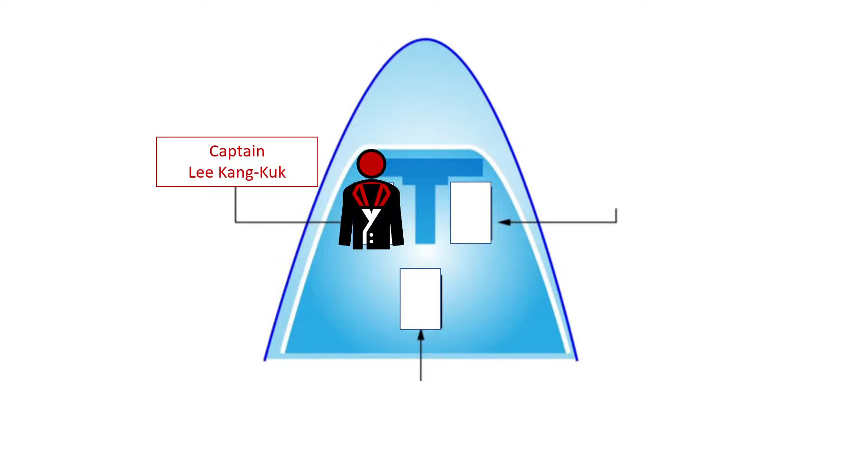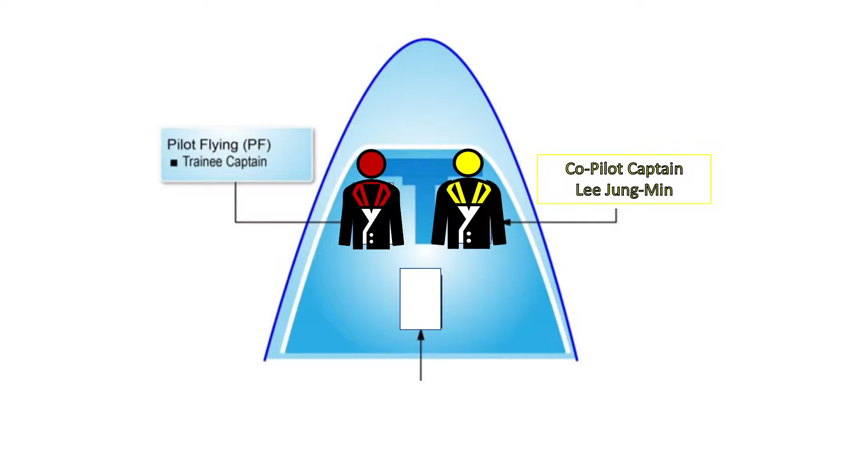Captain Lee Jung-Min, 41 years old, had 12,387 flight hours, including 3,220 on the Boeing 777. We will refer to him as the pilot monitoring, as he was responsible for monitoring the trainee captain.

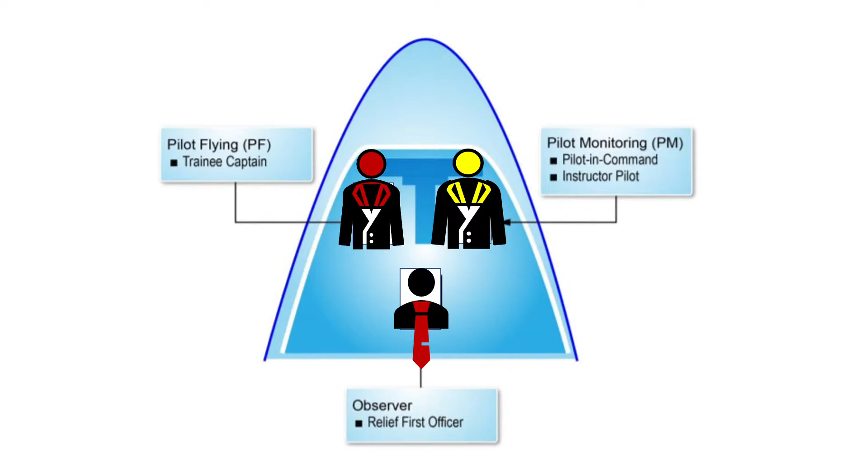Additionally, there was a relief first officer sitting in the cockpit jump seat. Sitting somewhere in business class, a relief captain was also on board to provide relief to the primary cockpit crew at some point en route of the 10.5-hour-long flight. The aircraft was staffed with 12 flight attendants. There was also a total of 291 passengers on board.

Because of the presence of visual meteorological conditions, San Francisco Approach Control was able to give Asiana 214 a clearance for a visual approach without a working instrument landing system. The pilot monitoring confirmed the clearance and the cockpit crew began their descent. The lack of an instrument landing system, or ILS approach clearance, is an important factor when we discuss accident findings.

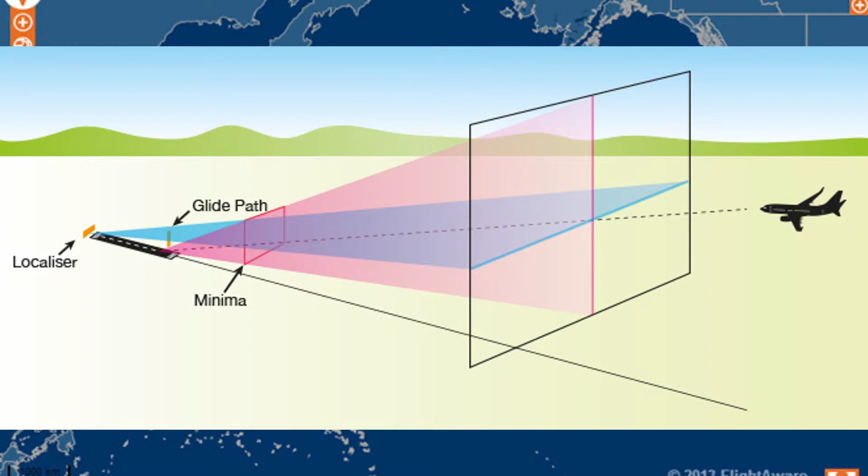The pilot monitoring recognized this and alerted the pilot flying. They were able to get the aircraft on the appropriate visual glide slope 30 seconds before the crash. However, it seems that the pilots overshot their rapid descent rate, as the PAPI lights indicated that the aircraft was very low 19 seconds before the crash.

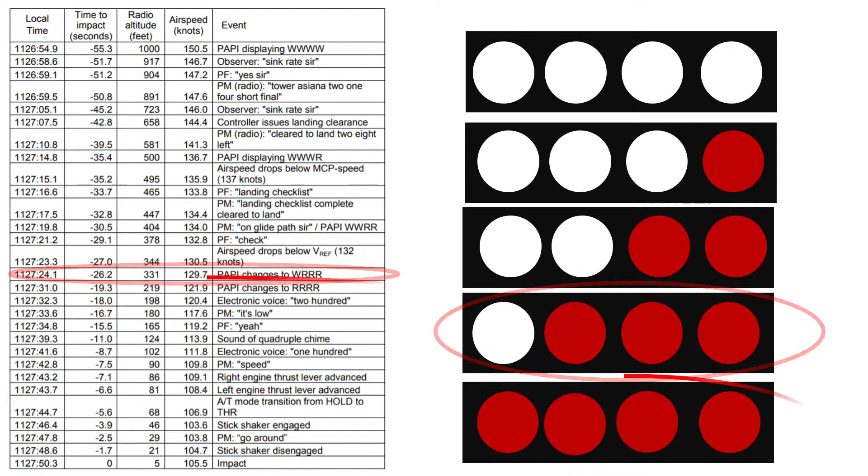We are now going to watch a short flight simulator clip. This ghost aircraft shows where the plane should have been, while the solid plane simulates where it actually was.

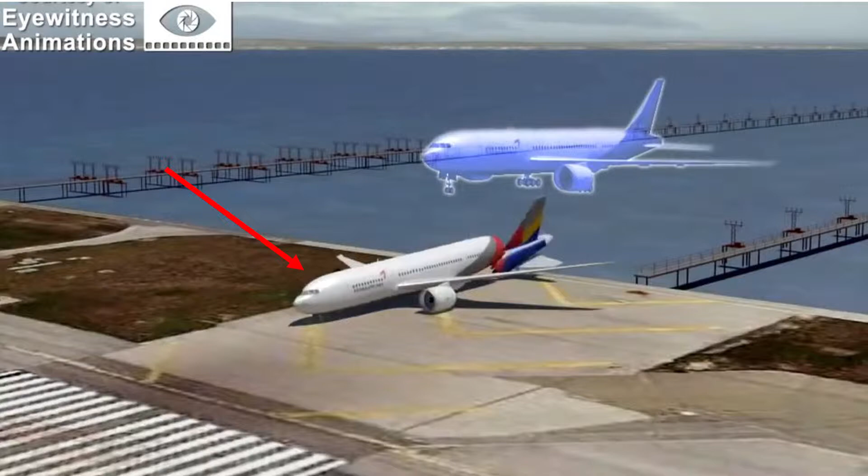Asiana 214, San Francisco, runway two eight left, cleared to land. Cleared to land two eight left, Asiana 214.

The NTSB identified the following as probable causes of the accident: the flight crew's mismanagement of the aircraft's descent during the visual approach, the pilot flying's unintended deactivation of automatic airspeed control, the flight crew's inadequate monitoring of airspeed, and the flight crew's delayed execution of a go-around after they became aware that the airplane was below acceptable glide path and airspeed tolerances.

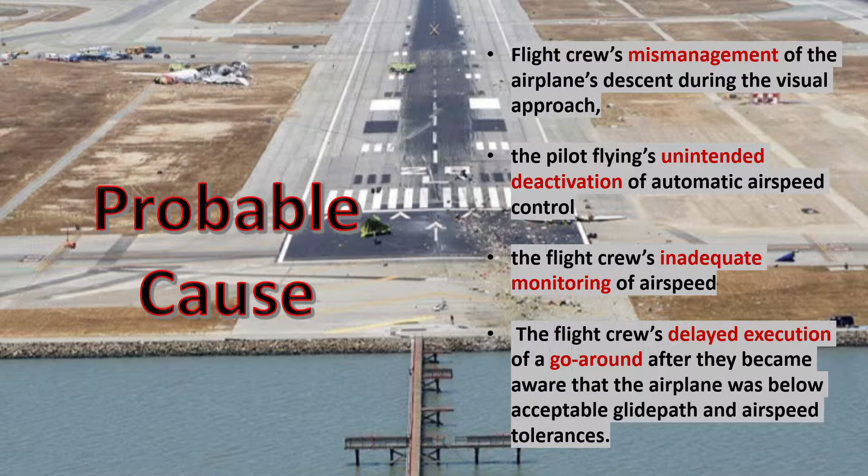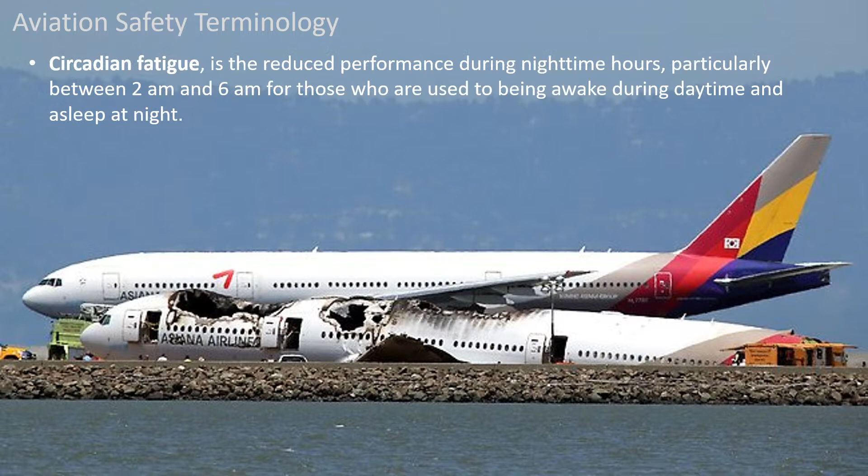We are now going to look at how automation error, mode confusion, automation surprise, circadian fatigue, and crew resource management played a role in this accident.

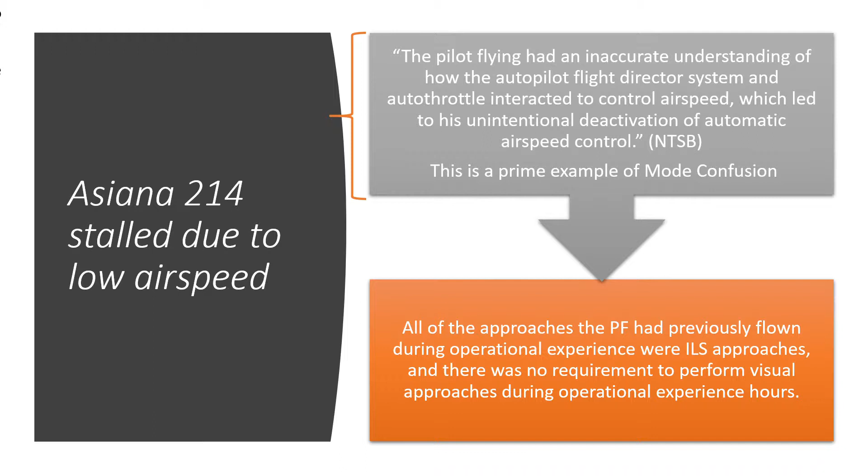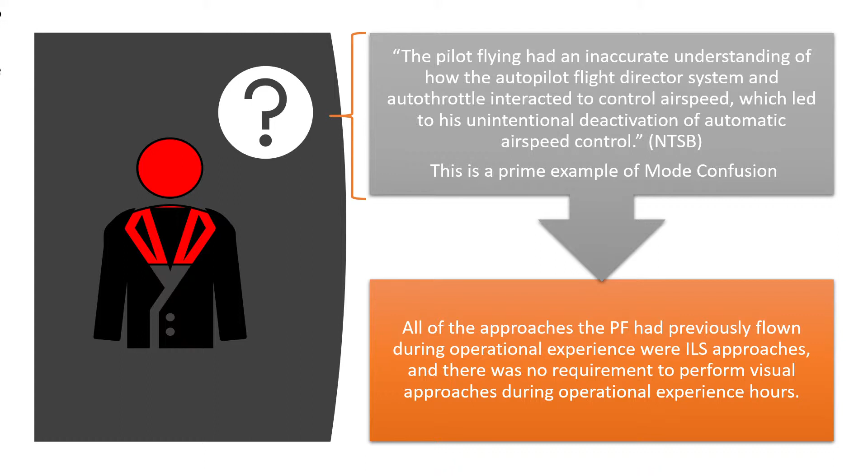The plane crashed due to a low airspeed stall. The NTSB identified that the pilot flying had an inaccurate understanding of how the autopilot flight director system and autothrottle interacted to control airspeed, which led to his unintentional deactivation of automatic airspeed control. This is a prime example of mode confusion.

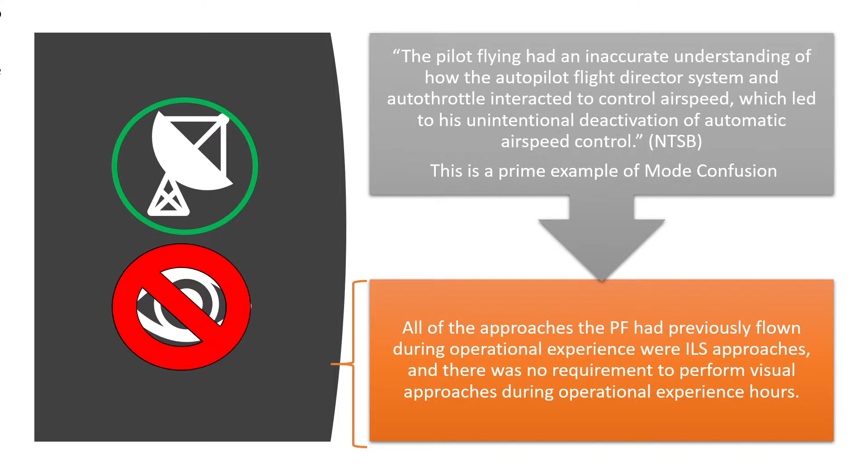Additionally, all of the approaches the pilot flying had previously flown during operational experience were ILS approaches, and there was no requirement to perform visual approaches during operational experience hours.

The NTSB found that in the 24 hours before the accident, the pilot flying, the pilot monitoring, and the observer obtained about 5.5 hours, 8 hours, and 10.5 hours of sleep, respectively, as compared to their self-reported sleep needs of about 7.5 hours, 7 hours, and 7.5 hours.

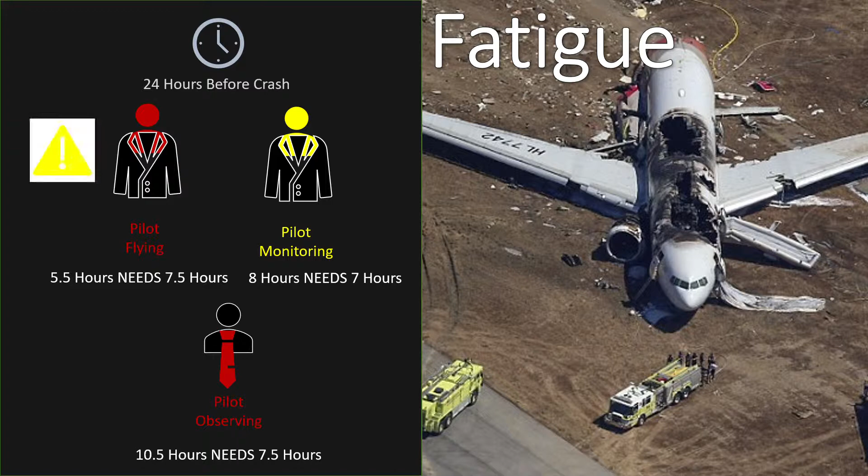Thus, the pilot flying received less sleep than normal in the 24 hours before the accident. Notably, the accident occurred during the pilot's circadian trough, a period about midway through the normal sleep period when a person's physiological state of arousal is normally at its lowest. The human body cannot adapt to transiting 8 time zones in the span of 10 hours. Therefore, all 3 pilots were likely fatigued as a result of circadian disruption.

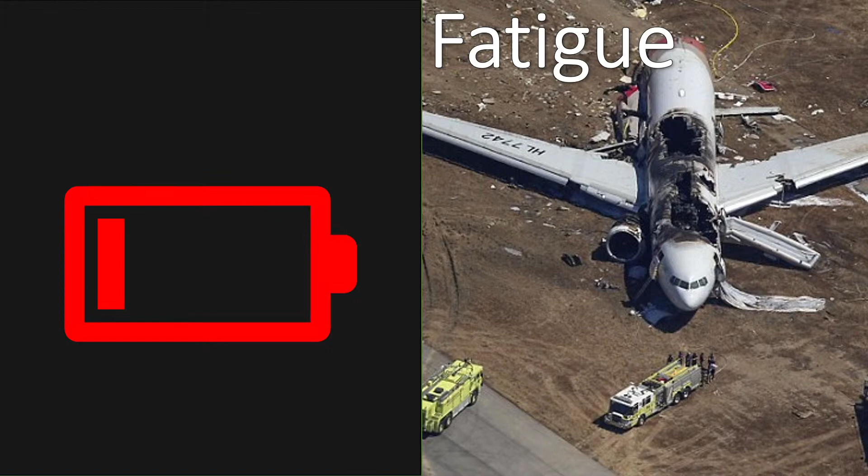Poor crew resource management was arguably the leading cause of the accident. As a reminder, the trainee captain was the pilot flying, the pilot in command was the pilot monitoring, there was a relief first officer in the jump seat, and there was a relief captain, but he was in the cabin business class at the time of the approach.

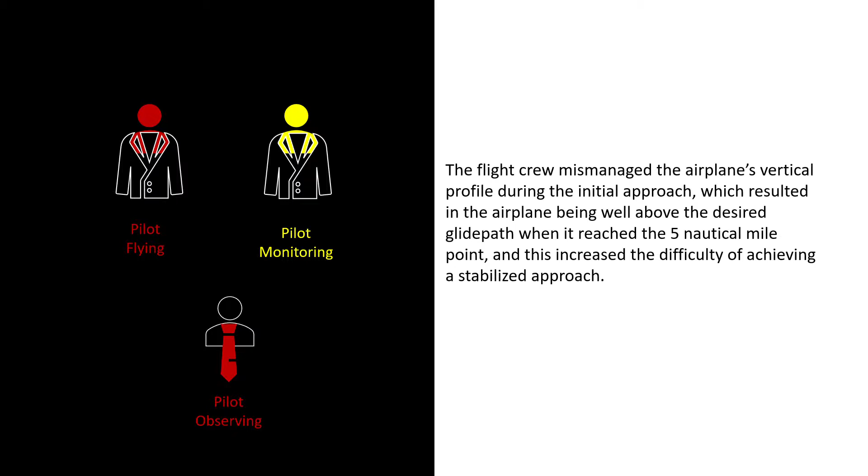Upon investigation, the NTSB stated the following findings. The flight crew mismanaged the airplane's vertical profile during the initial approach, which resulted in the airplane being well above the desired glide path when it reached the 5 nautical mile point, and this increased the difficulty of achieving a stabilized approach. The flight crew's mismanagement of the airplane's vertical profile during the initial approach led to a period of increased workload that reduced the pilot monitoring's awareness of the pilot flying's actions around the time of the unintended deactivation of automatic airspeed control.

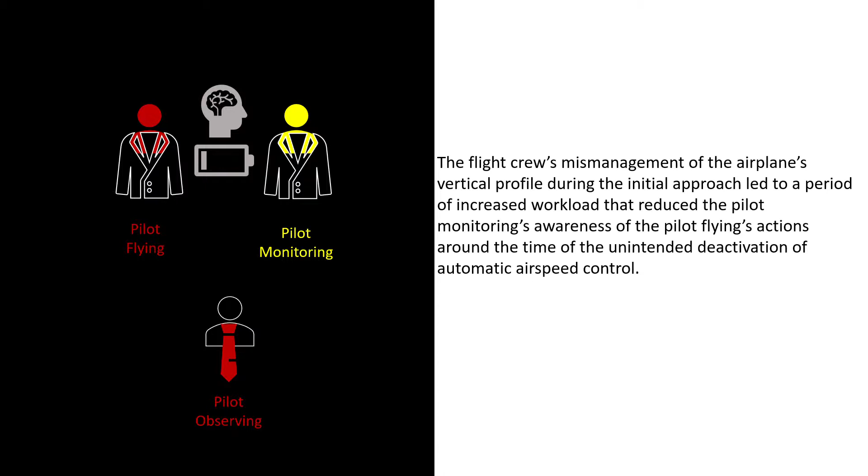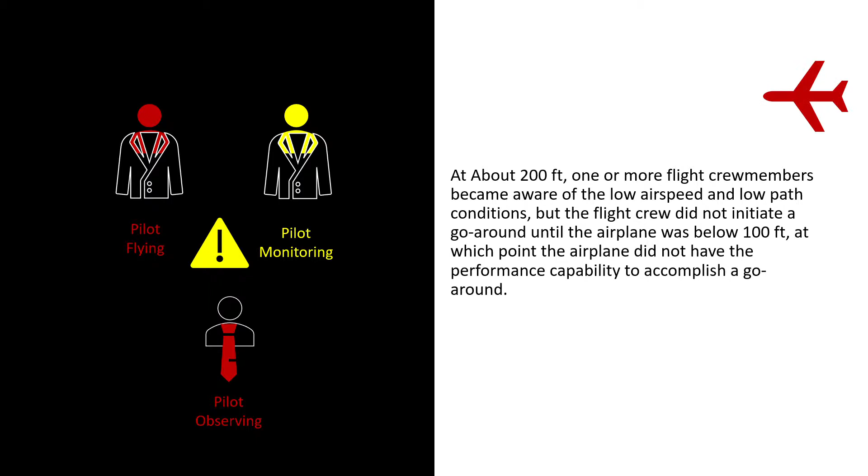At about 200 feet, one or more of the flight crew members became aware of the low airspeed and low path conditions, but the flight crew did not initiate a go-around until the plane was below 100 feet, at which point the airplane did not have the performance capability to accomplish a go-around.

The accident caused complete destruction to the aircraft by the impact and post-crash fire. There was also damage done to the PAPI lights and part of runway 28 left.

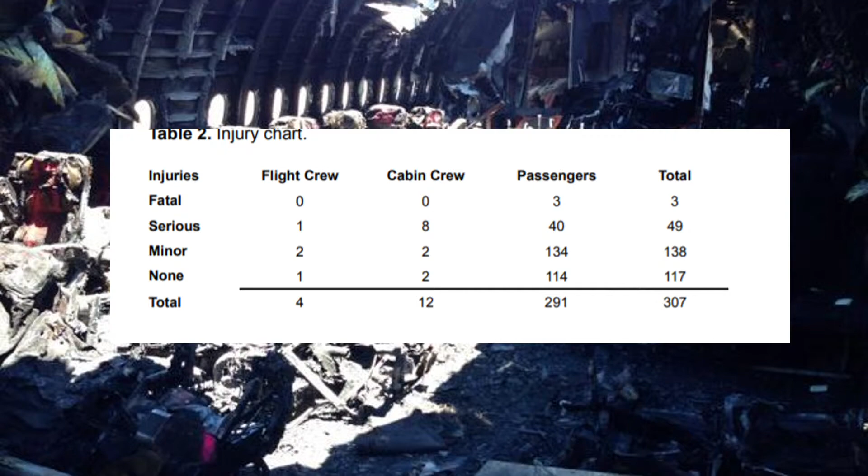I discussed this accident with commercial pilot student Carlos Berezueta de Felipe. He made the following recommendations to Asiana Airlines: Asiana and other airlines must learn from this accident that pilots should be trained in all types of approaches, not only in using ILS, so that when they encounter a visual approach, they know how to control the aircraft. Also, another important aspect is to have a very deep knowledge of your airplane systems and how they behave in the different scenarios to avoid that type of accident.

The lack of CRM between the pilots was one of the main reasons for this accident, because neither Captain Lee Kang-kuk nor Captain Lee Jung-min were able to communicate their actions and use the cockpit resources to solve the problem. Asiana Airlines could avoid this and improve their CRM training to pilots by showing them other types of accidents related to lack of CRM. I also wanted to understand his expectations from his future airline employer.

I expected my future airline training to be well capacitated in all aspects of aviation, starting from the basic knowledge a pilot must have, the aircraft systems in which I will be flying, CRM, situational awareness, and to be prepared in simulator training in any type of malfunction or problem that may arise.

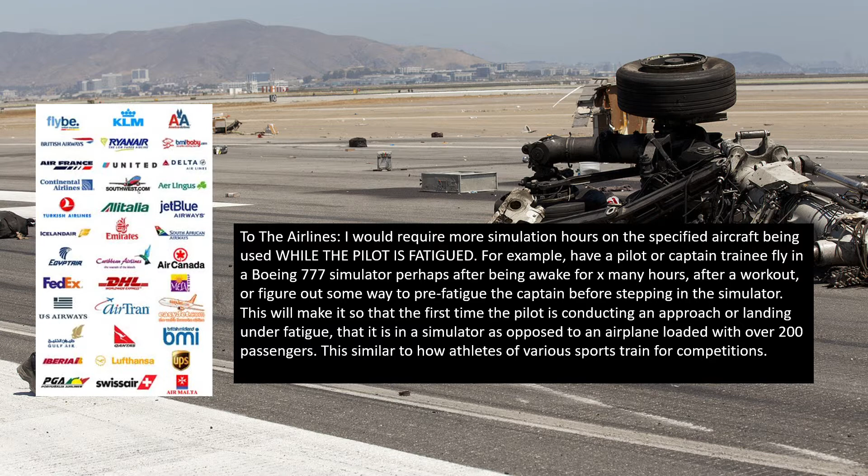Recommendations to the airlines: I would require more simulation hours on the specified aircraft being used while the pilot is fatigued. For example, have a pilot or captain trainee fly in a Boeing 777 simulator, perhaps after being awake for many hours or after a workout, or figure out some way to pre-fatigue the captain before stepping into the simulator. This will make it so that the first time the pilot is conducting an approach or landing under fatigue, it is in a simulator as opposed to an airplane loaded with over 200 passengers.

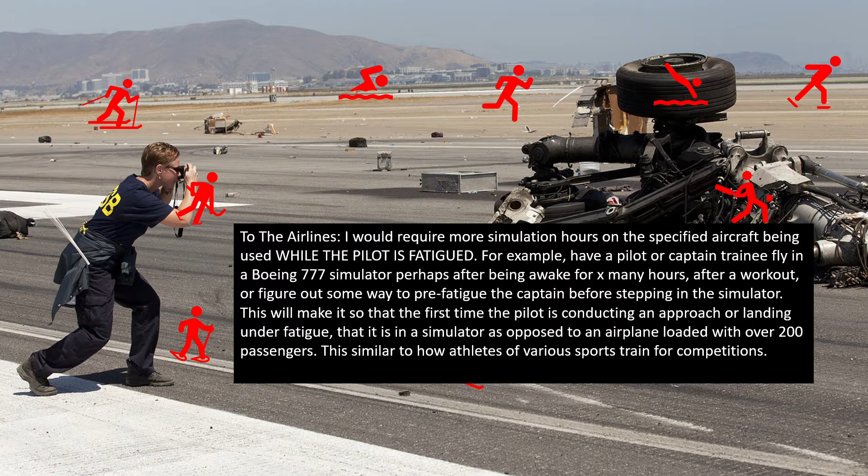This is similar to how athletes of various sports train for competitions. I would decentralize my pilot training from automation reliance to a system of more checks and balances, so that it is not human versus automation, but rather humans with automation.

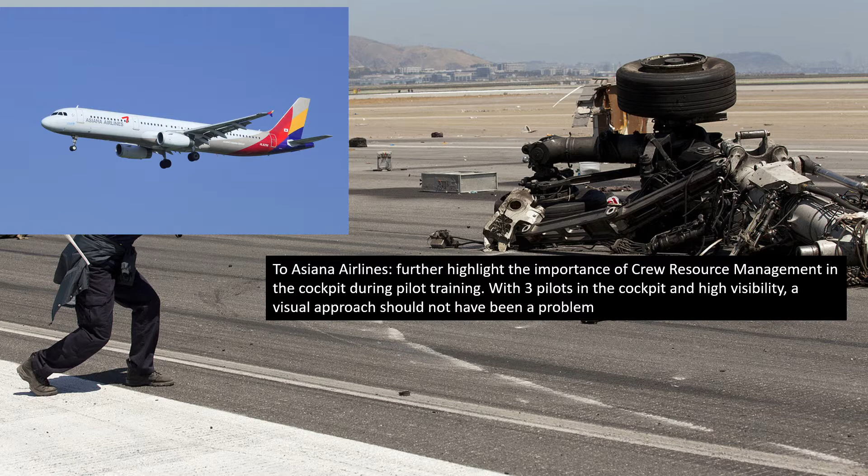The pilot flying should have been comfortable with visual approaches, and if he was not, he should have let the pilot in command take over controls. To Asiana Airlines, I would further highlight the importance of crew resource management in the cockpit during pilot training. With 3 pilots in the cockpit and high visibility, a visual approach should not have been a problem.

To Boeing, I would request that they simplify their 777 computer operations or manuals explaining them, as it was agreed upon by the NTSB that the system was indeed confusing.